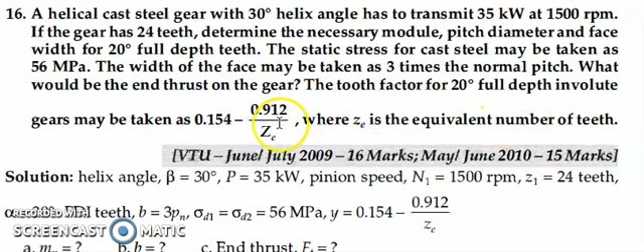We know that, and we can write the given data. The helix angle is given as 30 degrees. The power is 35 kilowatt, and the speed of the pinion N1 is 1500 rpm. Number of teeth on pinion Z1 is 24, and alpha is 20 degree involute. B is given as a condition equal to 3 into Pn, and sigma D1 and sigma D2 are both the same, equal to 56 megapascal.

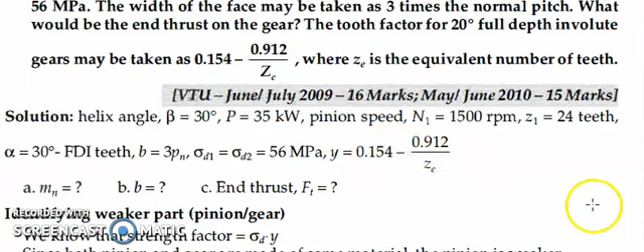The value of Y is not directly taken from the data book, it is directly given in the question itself, so you can take that value from the question. They ask about the module and the face width, then the end thrust, which we denote as Ft.

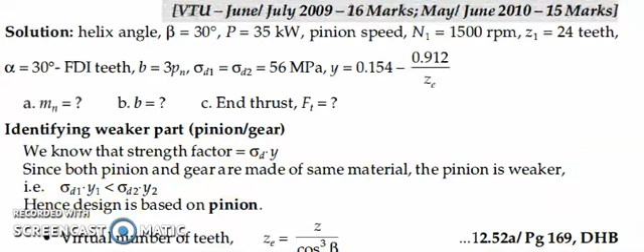Next, first we identify the weaker part using the strength factor. Here the value for sigma D and Y will be the same, because the material for the gear and pinion are the same. So we can identify that the pinion is the weaker one. Since both pinion and gear are made of the same material, the pinion is weaker. So we conclude this first section: the design is based only on the pinion.

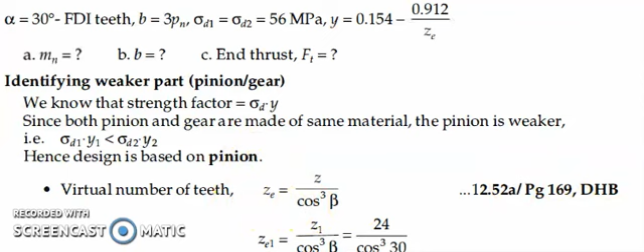Next, the virtual number of teeth. We can calculate the virtual number of teeth using this equation: Ze is equal to Z by cos cube beta. From that equation we calculate and get the value of ZE1 equal to 37.

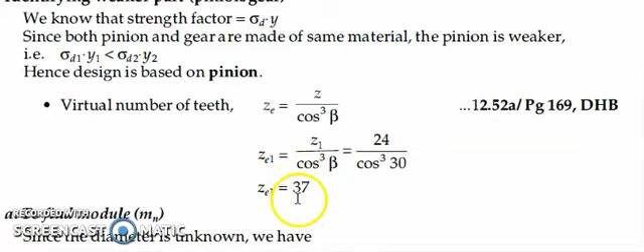Then next is the module. We calculate the module using this equation: 12.60 Mn equal to cube root of 2Mt Cw cos beta divided by sigma d Cv k Y into Z, and we can calculate the value of mt. So if the diameter is unknown, we use this equation from the data book. Please underline this section: if the diameter is unknown, we should use this equation.

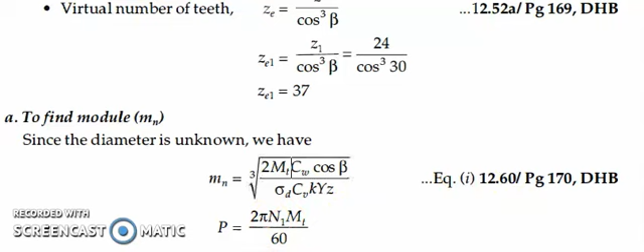Here the power is given also, so we can calculate the value of mt using that equation. P is equal to 2 pi N1 Mt by 60, and now we get Mt equal to 222.82 in Newton meter. We can convert it into Newton millimeter.

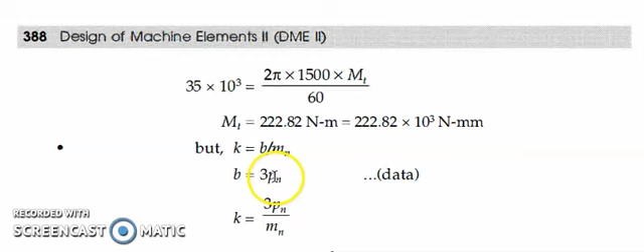The value of B is given as 3 into Pn in the given data, so we do not assume any value for K. Take the direct value of K equal to 3 into Pn divided by Mn.

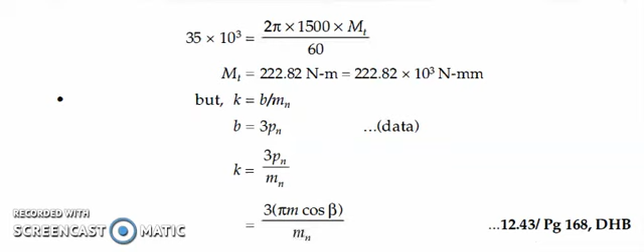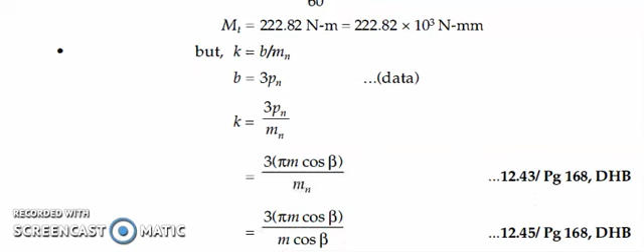We know that Pn is equal to pi into Mn cos beta from equation 12.43. Using that equation we can take the value of K is equal to 3 pi. But in this case, the value of K we cannot assume, because it is directly given in the question itself.

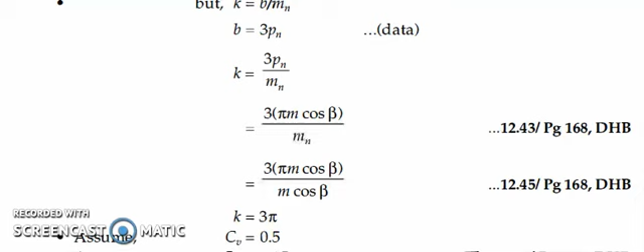Next, assume the value of Cv. V is not given, or N1 is not given, so we can directly take the value Cv is equal to 0.5. Then Cw, using table 12.21, we can assume the value of Cw is equal to 1.15. Then the form factor Y is equal to pi into Y1.

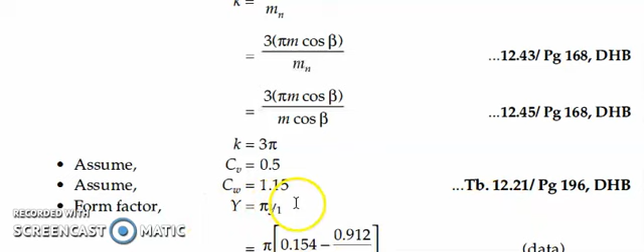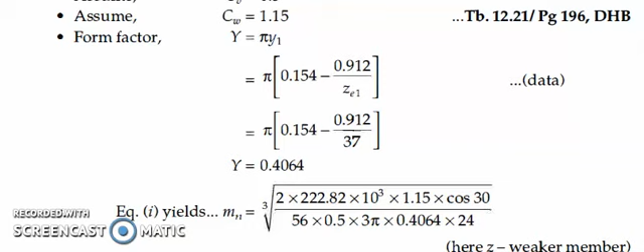Using these values we can find the value of Mn. Using your calculator, find the value of Mn, which becomes 5.57. Then using table 12.2 we can standardize the value of module, so Mn is equal to 6 mm.

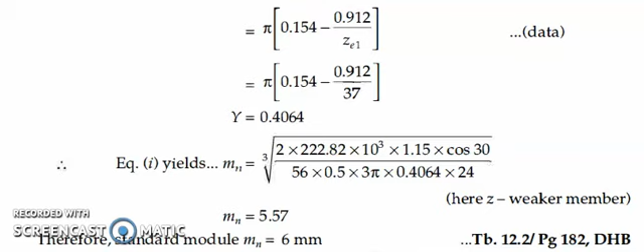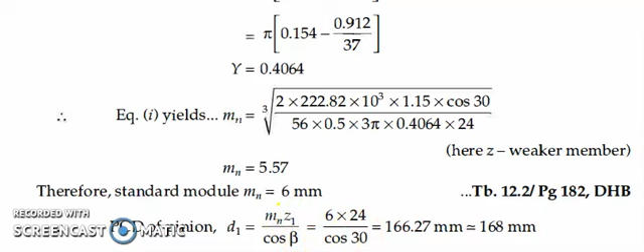Once we get the Mn value, we can go for PCD, that is D1 and D2. We can find the value of d1 using the equation mn into z1 divided by cos beta, which is already given in the data book as equation 12.47. Using this equation you can find the value of d1.

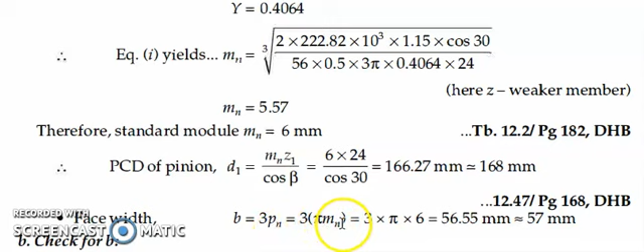Then for face width, the question itself gives that b is equal to 3 into pn. Using this equation we know that pn is equal to pi into mn. So using this we can find the value of face width.

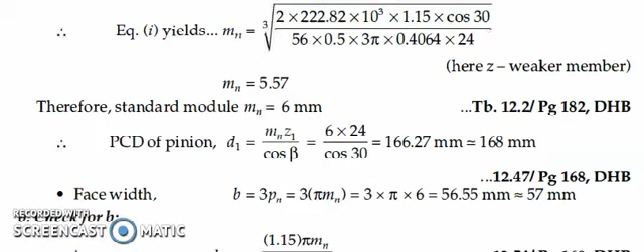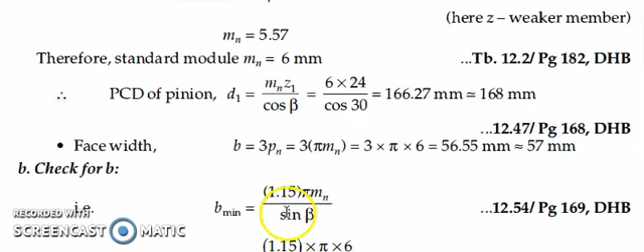Next we can check whether the calculated face width value is safe or not. Using equation 12.54 we can check if the value is safe. That is, b minimum is equal to 1.15 into pi into mn divided by sine beta. Using this equation we get the value of b minimum equal to 43.35.

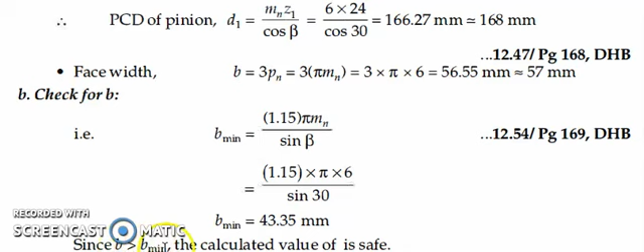So we can conclude that b, the calculated value, is greater than b minimum, so the values taken are safe. Next we can go for the next section.

We can assume the value of CV. We can check now if sigma d is safe or not. That is, ft is equal to sigma d into CV, already given in the data book as equation number 12.59. You write this equation, and using the value of n1, we take the value v is equal to 13.19.

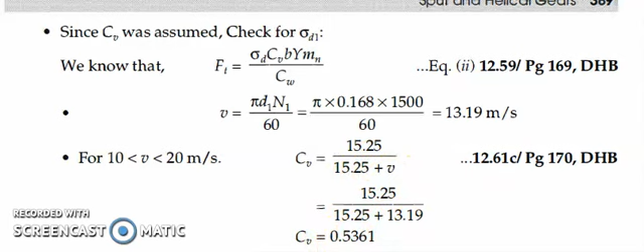From that equation take the value of CV is equal to 15.25 divided by 15.25 plus v, and this value is 0.5361. This method is used because the diameter is unknown, so we are using this method.

Next we can calculate ft is equal to 2mt divided by d, already given in equation number 12.22. Using this equation we will get ft is equal to 2652.62 Newton.

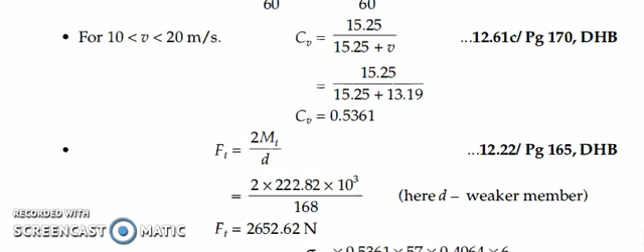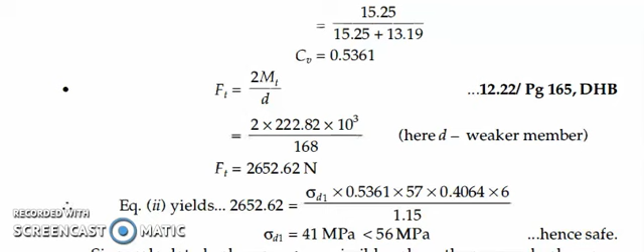Then we can check sigma d. Sigma d here is 41 megapascal. Using this equation and your calculator you will get the value of sigma d equal to 41 megapascal, which is less than the permissible value. The given value in our question is 56 megapascal, but the calculated value is 41 megapascal with our design parameters, so our design is safe.

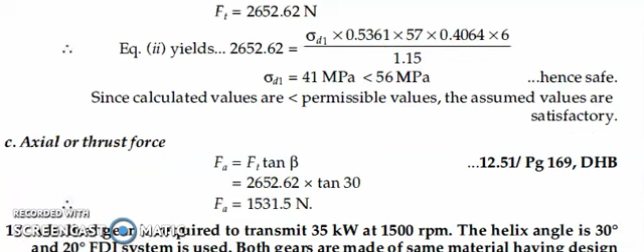Then next we can go for axial or thrust force. We can denote it as FA, that is equal to FT into tan beta, equation number 12.51. Using this equation we can find the value of axial thrust also. Thus we can conclude this question.